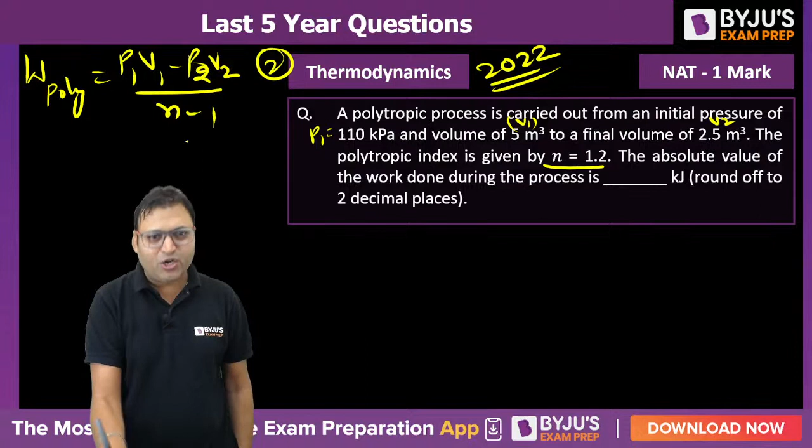YouTube channel. So the work done in a polytropic process, the simple formula is P1 V1 minus P2 V2 upon N minus 1. Do you remember? P1 is known, V1 is known, V2 is known, N is known. The problem is about P2. So for a polytropic process, can we say P2 by P1 is equal to V1 by V2 to the power N?

For a polytropic process, can we say P2 by P1 is equal to V1 by V2 to the power N? So what is P2? That is P1, 110 kilopascal. What is V1 by V2? 5 upon 2.5, that is 2, to the power 1.2. What is the value of P2? Who will be giving me the value of P2? Keep your pen, notebook and calculator. And do let me know if my value is matching with yours or not.

252.71. Very nice. 252.71 kilopascal. Once you get the value of P2, then you can easily find the work done. If the answer should be in kilojoule, keep the pressure in kilopascal. Do not get confused with the units. You should be comfortable with the units so that you can play with them.

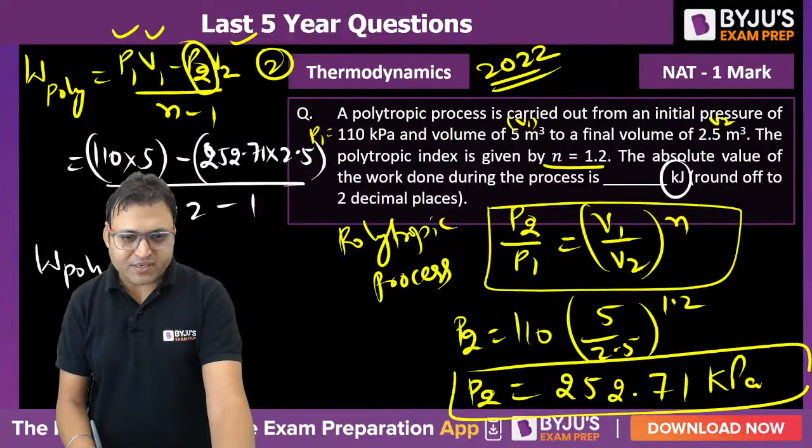So what is P1? 110 into what is V1? 5, minus what is P2? 252.71 into what is V2? That is 2.5, upon N minus 1, that is 1.2 minus 1. What will be the answer? What is the work done in a polytropic process? Who will get me the answer for this? Quickly, everyone. You will be getting negative. Are you getting negative?

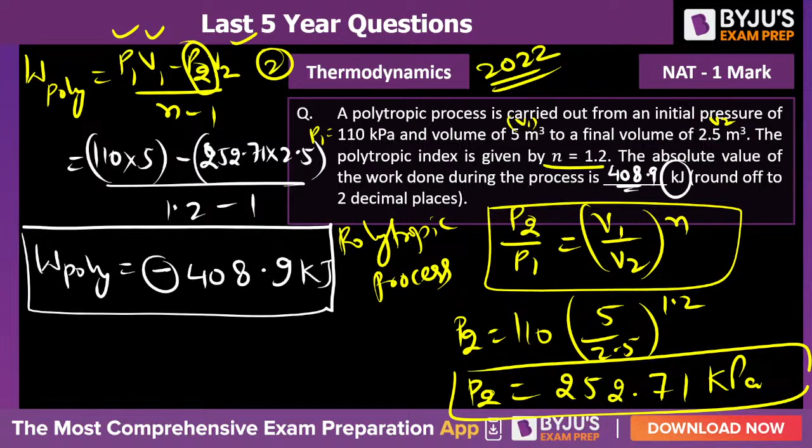408.9 kilojoule. Why are we getting it in kilojoule? Because the pressure is taken in kilopascal, isn't it? 408.9 kilojoule will be the correct answer to question number 2. Let us move to the next one. Yes, Arnab, Nitesh, well done.

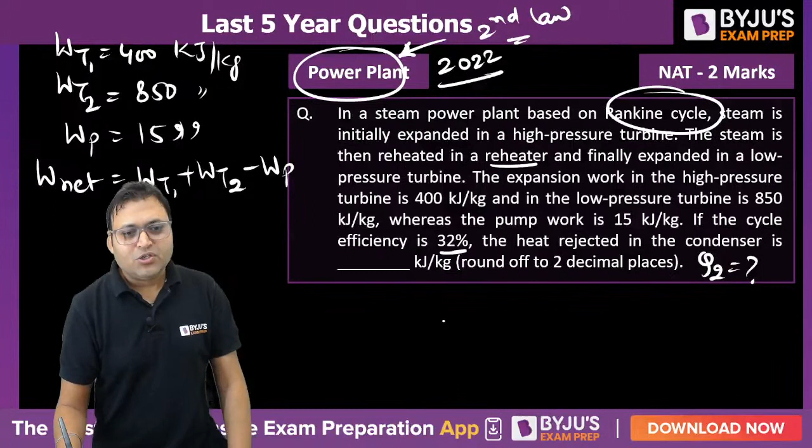So W net will be equal to 400 plus 850 minus 15 kilojoule per kg. Can you find out the value of W net? 1250 minus 15, 1235. So the thermal efficiency 0.32 is equal to W net upon Q1, heat supplied. So Q1 is equal to W net upon 0.32, that is 1235 upon 0.32. So Q1 will come out to be

3859. Yes, very nice. Are you getting Q1 as 3859.37 kilojoule per kg or not? The question is not about heat input. The question is actually about heat output to the sink. So Q2 must be equal to Q1 minus W net. So it will be 3859.37 minus 1235. That will give you the final answer.

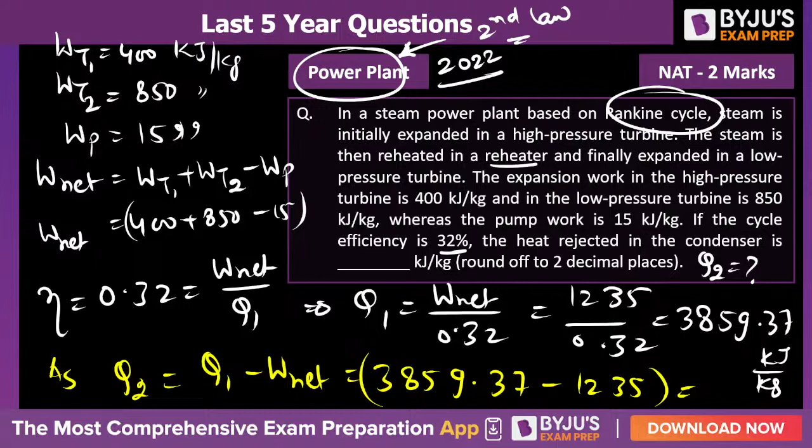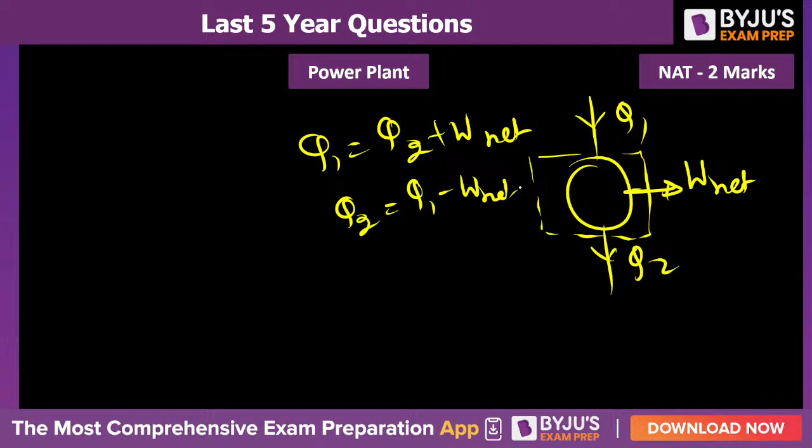Are you adding it? You need to subtract. If we draw, this is Q1 heat added, this is Q2 heat rejected, this is the net work output. From the first law of thermodynamics, Q1 is equal to Q2 plus W net, or Q2 is equal to Q1 minus W net. You need to subtract it. Are you guys getting 2624.3? Give me yes, give me cheer.

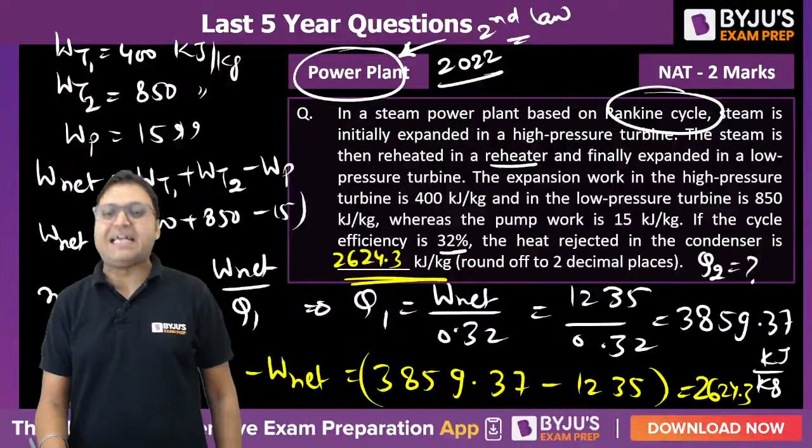2624.3. 2624.3 kilojoule per kg. Simple question from the cyclic device, work producing cyclic device, whether it is Rankine cycle or Brayton cycle or Otto cycle. How does it really matter? How does it matter, right?

Critical pressure is the pressure for which the velocity of the fluid becomes velocity of pressure wave. That is called as critical pressure. The velocity of the fluid becomes equal to velocity of the sound. So Mach number is equal to 1. This happens at the throat. So for the critical flow condition, Mach number will be equal to 1, the mass flow rate will be maximum and the back pressure will become equal to critical pressure. These are the characteristics of choked condition, right?

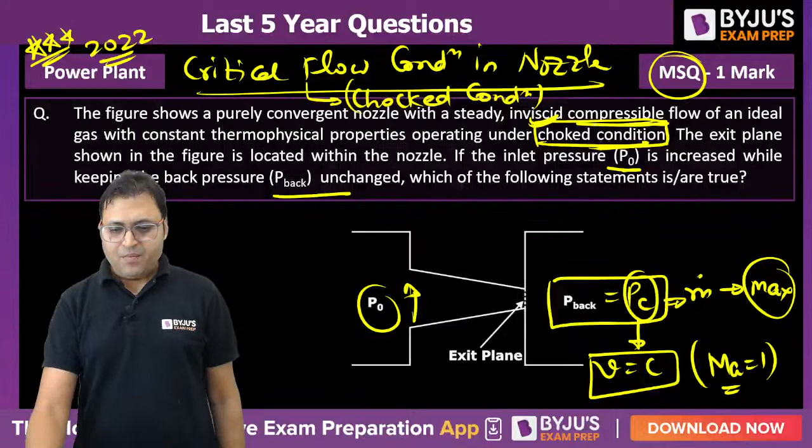Mass flow rate per unit area is given by under root of gamma by R into P naught by under root T naught into (1 upon (gamma plus 1) by 2) to the power (gamma plus 1) upon twice of (gamma minus 1). This is the expression. So mass flow rate will be dependent on P naught. As P naught increases, the mass flow rate also increases. B and C will be the right answer for this one. B and C both will be correct.

The next question is from 2023. Can you guys solve the next one? A heat engine extracts heat QH from a thermal energy reservoir at a temperature of 1000 Kelvin, that is T1, and rejects heat QL to a thermal reservoir at a temperature of 100 Kelvin. This is T2. While producing work, which one of the following combinations of QH, QL and W given is allowed?

First law says Q1 should be equal to Q2 plus W. That is the first law of thermodynamics. If we talk about an engine, Q1 is heat added, Q2 is heat rejected, and W is the work output. So from the first law of thermodynamics, for any system, the net heat transfer is equal to net work transfer, or energy entering is equal to energy leaving.

If you talk about option A, QL plus W is equal to 1500, but QH is 2000. A violates first law. If we see D, QL is equal to 600 and W is equal to 5500, it means it is greater than 6000. D violates first law. So B and C are the probable candidates. If the efficiency of this heat engine is less than Carnot efficiency, then only the cycle will be possible. So what will be the Carnot efficiency?

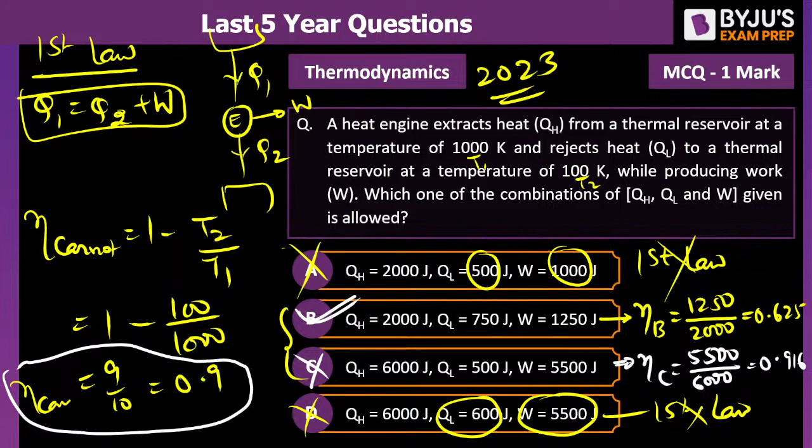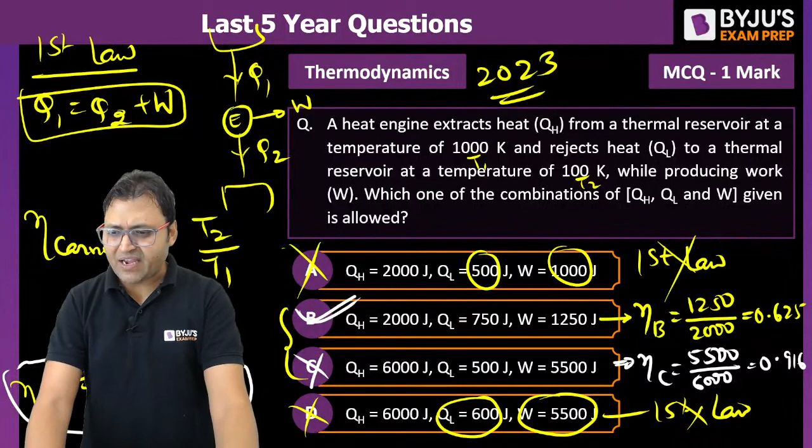Isn't it 0.916? So C cannot be correct because the efficiency should always be less than the Carnot efficiency. So only B can be the right answer. It is only B which can be correct. I hope this is clear. Right? Shall we proceed further? If anybody is having any doubt, you are most welcome to ask me.

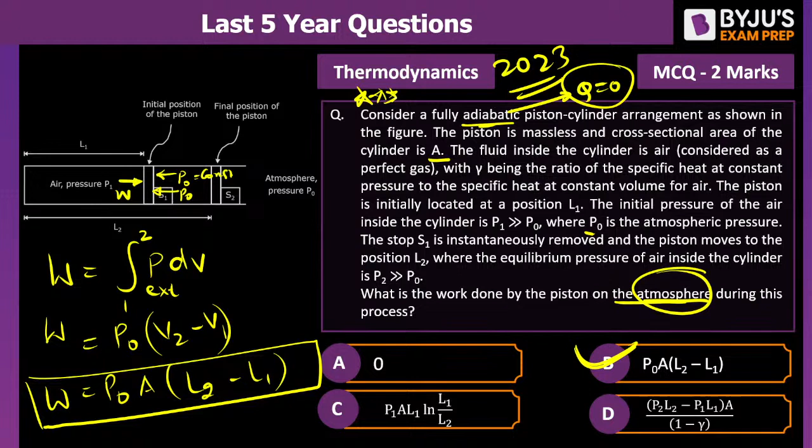Right? Let us move to the next one. Consider a mixture of two ideal gases X and Y with molar mass. This was asked in 2023. Consider a mixture of two ideal gases X and Y with molar masses. Molar mass is molecular weight. Either we call it as molar mass or we can call it as molecular weight.

And what is the unit of molecular weight? Gram per mole or kg per kilomole. So the molecular weight of X is equal to 10 kg per kilomole and the molecular weight of Y is 20 kg per kilomole. These are the molecular weights or molar masses respectively in a container. The total pressure in the container is 100 kilopascal. It is the mixture, so total pressure of the mixture is equal to 100 kilopascal.

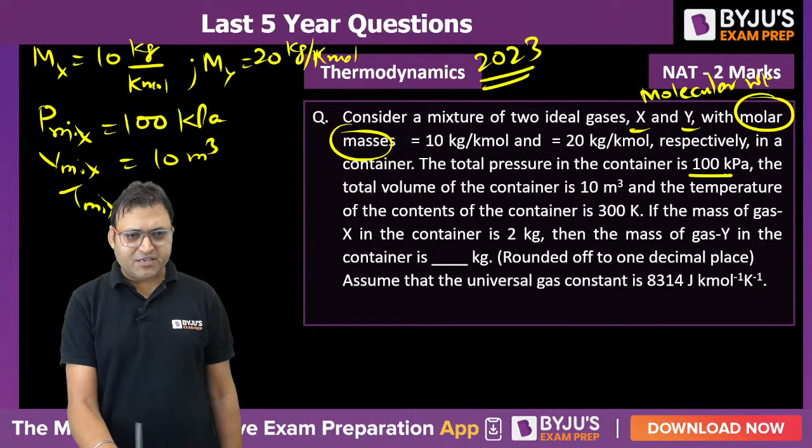The total volume of the container, volume of the mixture is equal to 10 meter cube, isn't it? And the temperature of the content of the container is 300 Kelvin. Temperature of the mixture is equal to 300 Kelvin. If the mass of X in the container is 2 kg, mx 2 kg, then the mass of Y is how much? That is the question. Can you find out my? How to do it?

They are ideal gases. These are the ideal gases. So can we write the ideal gas equation? PV is equal to mRT. P mix, V mix is equal to m mix into R mix into T mix. Or can we write it as PV is equal to N into R bar. R bar is universal constant into T. N mix into R bar into T mix.

So temperature of the mixture is given. R bar we all know. Universal gas constant is already mentioned, 8314 joule per kilomole Kelvin. And pressure of mixture is given. We need to write N for mixture, that is equal to Nx plus Ny. The number of moles of the mixture is Nx plus Ny. So what is Nx plus Ny? Pressure of the mixture is 100 kilopascal. Volume of the mixture is 10 meter cube.

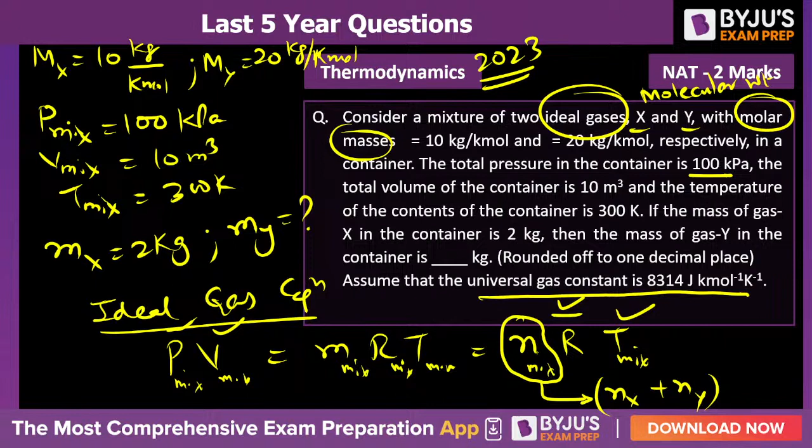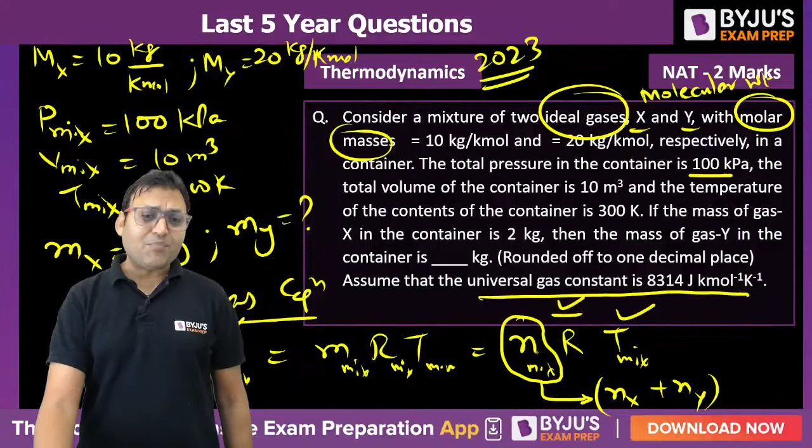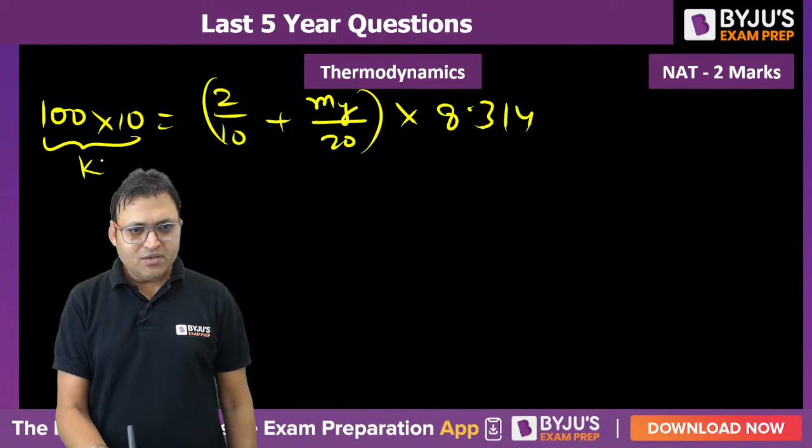Volume of the mixture is 10 meter cube is equal to Nx plus Ny. So mass of X, mx, that is 2 by 10, plus my, which is unknown, divided by molecular weight 20. Number of moles is mass upon molecular weight, in kilomole. Then R bar, can we write it as 8.314 because we want in kilojoule. Left hand side is kilojoule. 100 kilopascal into 10 meter cube is kilojoule, into temperature of the mixture, 300.

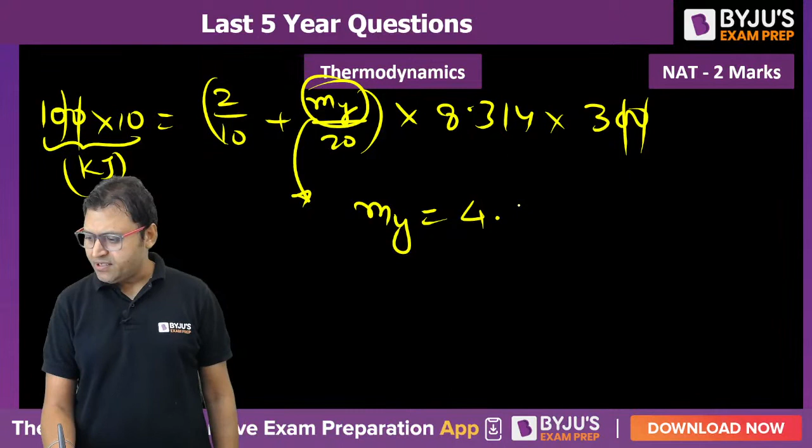Can you find out the value of unknown my? Yes, your turn now. Yes, Nitesh, well done. So these zeros will get cancelled out with this 2. So we can find out the value of my. Solve for my. My should come out to be 4.02 kg. It should be around 4.02 kg.

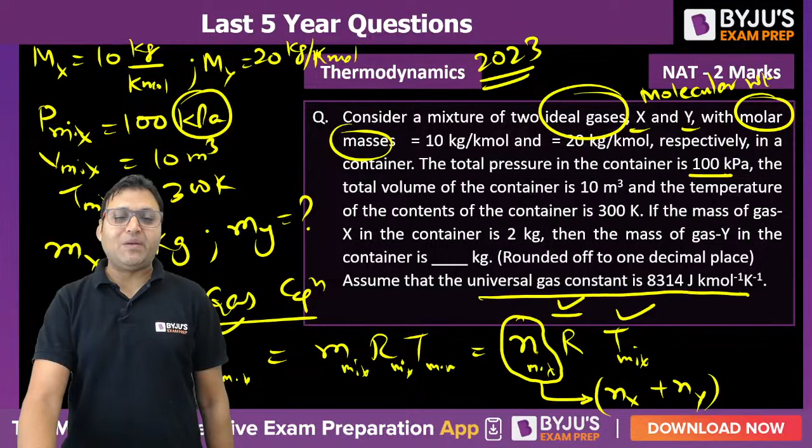Do not commit mistake in the units. If you are taking 8314, do not forget to take pressure of the mixture as 100 into 10 to the power 3. Pressure in kilopascal multiplied by volume in meter cube will become kilojoule. So because it is in joule, we need to convert it into kilojoule, then we will get the answer.

The next question, again from the compressible flow. Lot of questions were asked from the compressible flow in 2023. Question number 9. We are having around 15 questions in total. Consider an isentropic flow of air, specific heat ratio gamma 1.4, through a duct as shown in figure. The variations in the flow across the cross section are negligible. The flow conditions at location 1 are given by this: pressure, density, velocity.

The duct cross sectional area at section 2 is given by A2 is twice of A1. A1 denotes the cross sectional area at 1. Which one of the following statements about the velocity U2 and pressure P2 at location 2 is true? We need to find out the Mach number at location 1. That is U1 upon C1, U1 upon under root of gamma R T1, isn't it? So can you find out the Mach number at 1? U1 is given as 400.

And how to find out R? P is equal to rho RT. So R is equal to P by rho into T. So we can say 400 upon under root of gamma, 1.4, into P1 upon rho 1 into T1, into T1. Can you find out the value of T1?

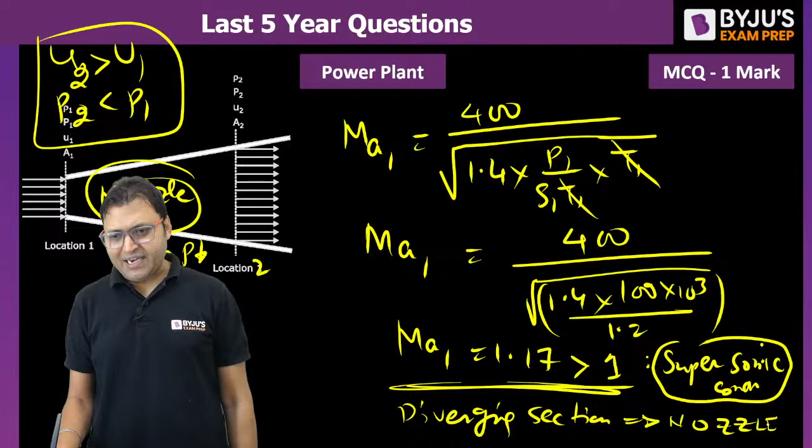In case of supersonic flow condition, if the Mach number is greater than 1, then the divergent section, this is location 2, is a nozzle, and in case of a nozzle, velocity increases and pressure decreases. So U2 is greater than U1, and P2 will be less than P1. Do you understand it? The diverging section will become a nozzle, and a nozzle always increases the velocity at the cost of pressure.

Option C will be the right answer for this one. This was question number 9. Let us move to question number 10, asked in 2022. An engine running on an air standard Otto cycle, constant volume cycle, has a displacement volume. What is the displacement volume?

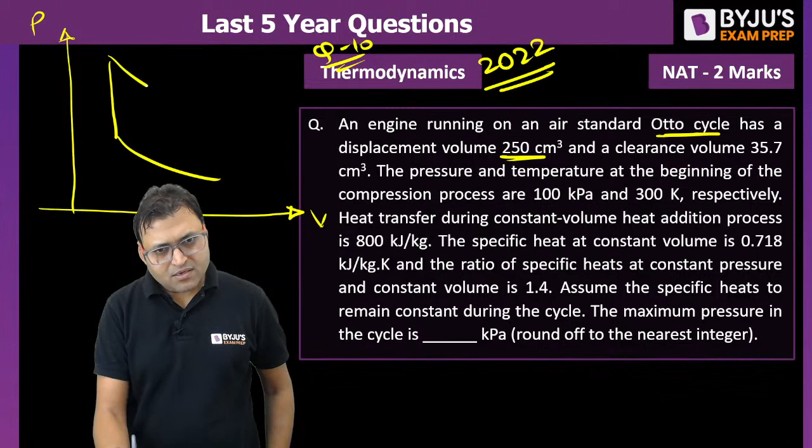If we draw the Otto cycle on a PV curve, it is something like this. 1 to 2 is isentropic compression, 2 to 3 is constant volume heat addition, 3 to 4 is isentropic expansion, and 4 to 1 is constant volume heat rejection. This is the Otto cycle. And what is the displacement volume? Displacement volume is this. This is V1, this is V2.

So displacement volume V1 minus V2 is given as 250 centimeter cube, and the clearance volume is this VC, and this is VS, swept volume or displacement volume. So V2 is given as 35.7 centimeter cube. The pressure and temperature at the beginning of the compression process are P1, 100 kilopascal, and T1, 300 Kelvin respectively.

Heat transfer during the constant volume heat addition process, this is QS per kg. The specific heat at constant volume is 0.718, and the ratio of specific heat at constant pressure and constant volume is 1.4. Assume the specific heat to remain constant during the cycle. The maximum pressure in the cycle: P3 is the maximum pressure. We need to find out the maximum pressure.

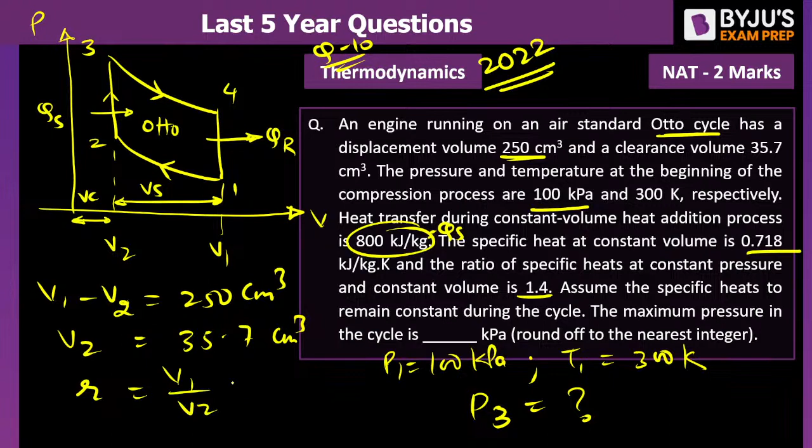But before that, can we find out the compression ratio? R is equal to V1 by V2. So can we say V1 minus V2, which is 250, divided by V2, which is 35.7. So V1 by V2 minus 1 is equal to 250 by 35.7. This is the compression ratio.

What is the value of R, the compression ratio? Will it come out to be 8? 250 divided by 35.7 is nothing but 7. So 7 plus 1, 8. Compression ratio will be 8.

Now, we need to find out P3 from 2 to 3. The process 2 to 3 is constant volume. If constant volume, we can say P is directly proportional to T. So P3 upon P2 is equal to T3 upon T2. We can find out the value of P3 from here. But for that, we require P2, T2 and T3, which we do not know.

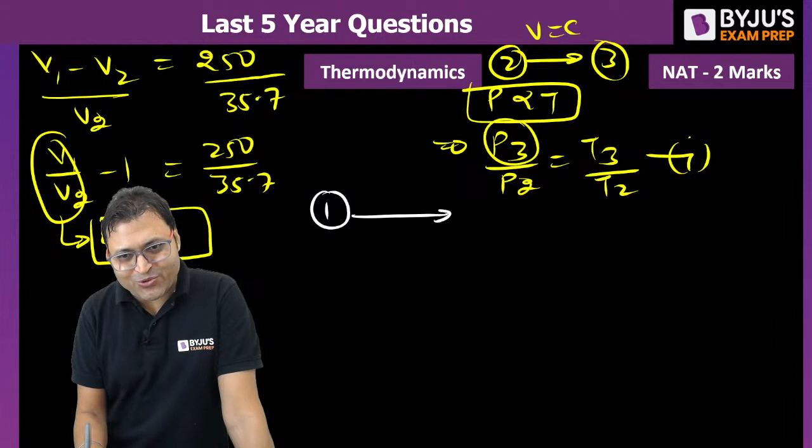So starting with the initial step, process 1 to 2 is isentropic. Then can we say P2 by P1 is equal to V1 by V2 to the power n or gamma? And V1 by V2 is R. So P2 is equal to P1 into R to the power 1.4. P1 is given as 100 kilopascal, into 8 to the power 1.4. Can you find out the value of P2?

Can you find out the value of P2? 1837.9. Are you getting P2? And similarly, we can say T2 by T1 is equal to V1 by V2 to the power gamma minus 1. So from here we can find out T2. T1 is given as 300 Kelvin. 300 into 8 to the power 0.4.

So T2 will come out to be, can you find out P2 and T2? T2 should come out to be 689.22. Right? T2 will be 689.22. So once we get P2 and T2, then using the heat addition, 2 to 3 is constant volume heat addition.

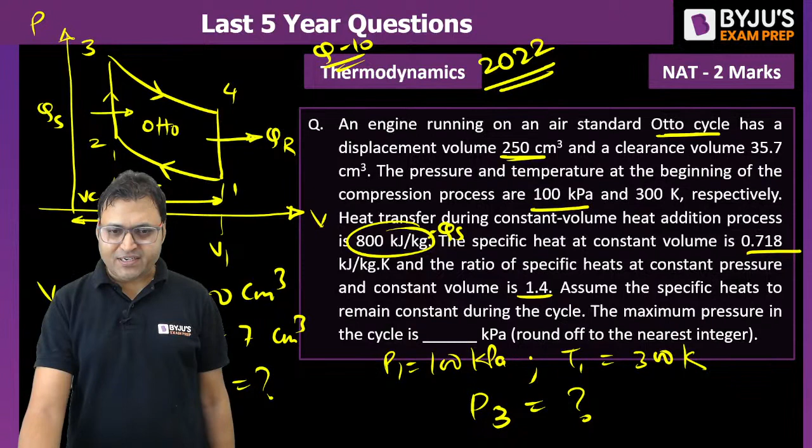So we can say QS is equal to CV into T3 minus T2. What is QS? How much is heat addition? 800 kilojoule. And CV is given as 0.718. 800 is equal to 0.718 into T3 minus T2. T2 is already calculated as 689.22. So using this we will get T3. The value of T3 should be equal to 1803.42.

Are you guys getting it or not? If you are not getting the values, please do let me know.

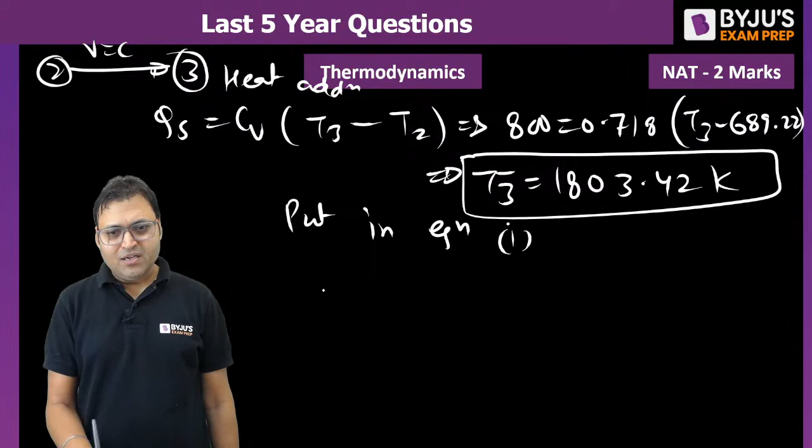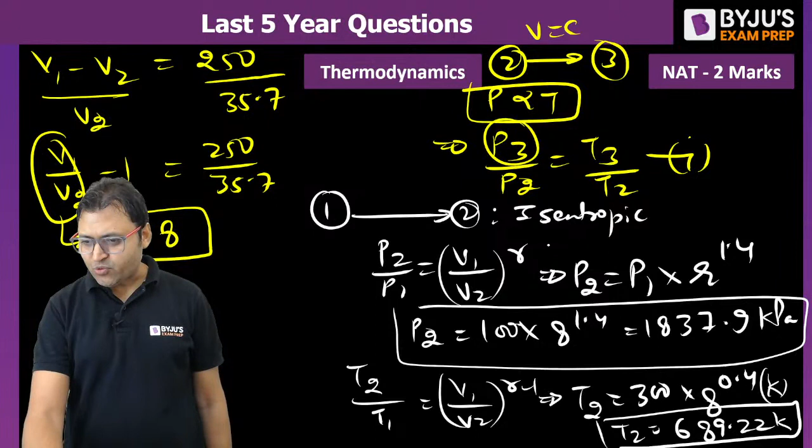Once we get all the values, put in equation number 1, so P3 is equal to P2 into T3 by T2. We have already calculated P2 as 1837.9, into T3 1803.42, upon T2, that is already calculated 689.22, will give the final value of P3. The final answer for P3 will be 4809.08.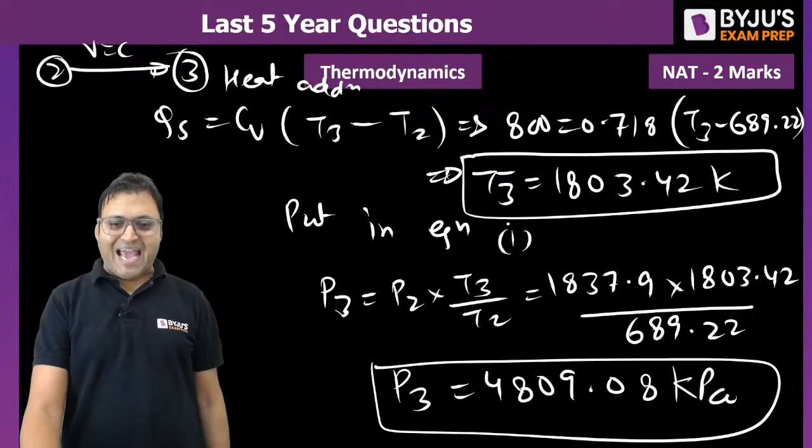4809.08 kilopascal. This is the maximum pressure in the cycle. I hope this is clear. 4809.08 kilopascal. Are you guys getting it? Bataiye, is this clear? This was question number 10 and let us move to question number 11.

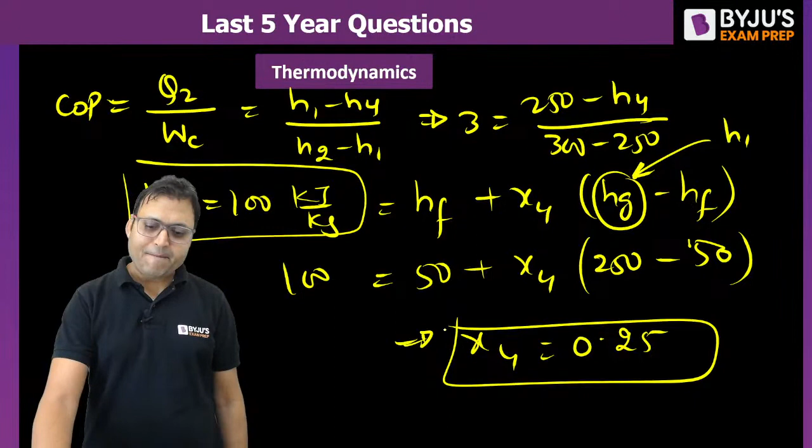0.25 will be the dryness fraction of the refrigerant at the entry, 0.25. B is the correct answer, right? The next question, question number 13. This was asked in 2022.

Consider 1 kg of an ideal gas, mass is 1 kg, at 1 bar, 300 Kelvin, contained in a rigid, means volume is constant, and perfectly insulated, means there is no heat transfer. The specific heat of the gas at constant volume is given. A stirrer performs 225 kilojoule of work on the gas. So the work input is equal to 225 kilojoule. Work is done on the system, so it will be taken as negative.

Assume that the container does not participate in the thermodynamic interaction. The final pressure of the gas is? So how to find out the final pressure? From the first law of thermodynamics, can we say Q is equal to W total plus delta U? Q is equal to 0. So delta U is equal to minus W total. What is the total work? That is minus W due to stirrer plus integration of PdV, that will be 0 because volume is constant.

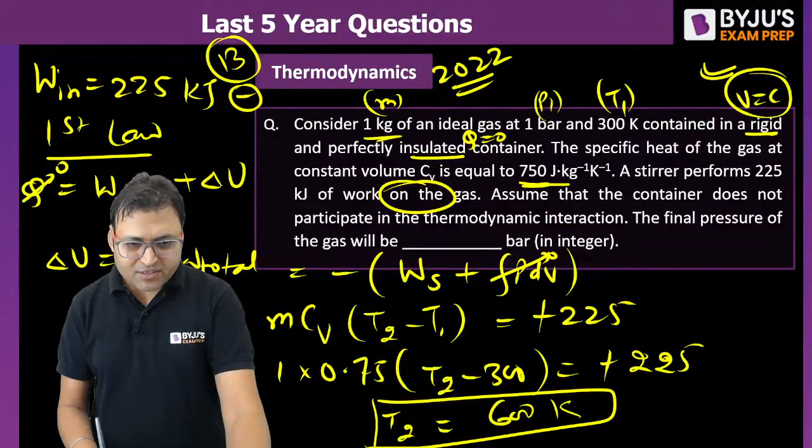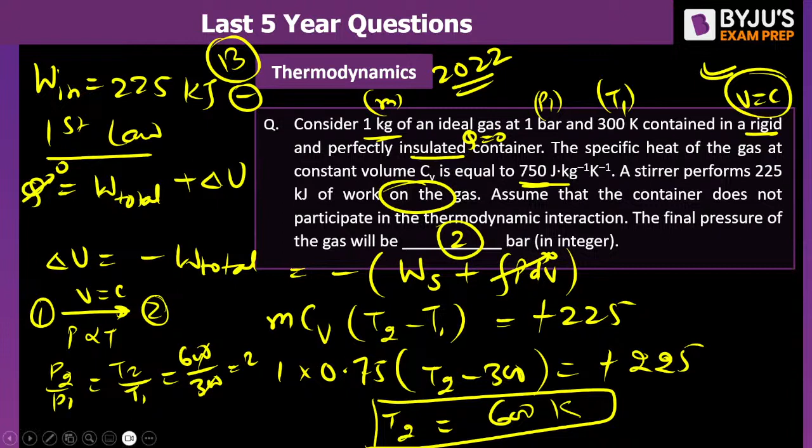Once we get T2, the process 1 to 2 is constant volume process. So we can say pressure is directly proportional to temperature. So P2 by P1 is equal to T2 by T1. What is T2 by T1? 600 by 300, that is 2. So P2 is twice of P1. So P2 will become 2 bar.

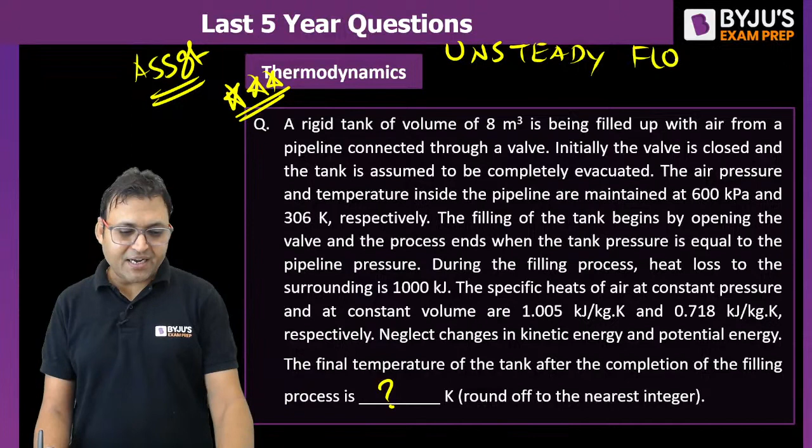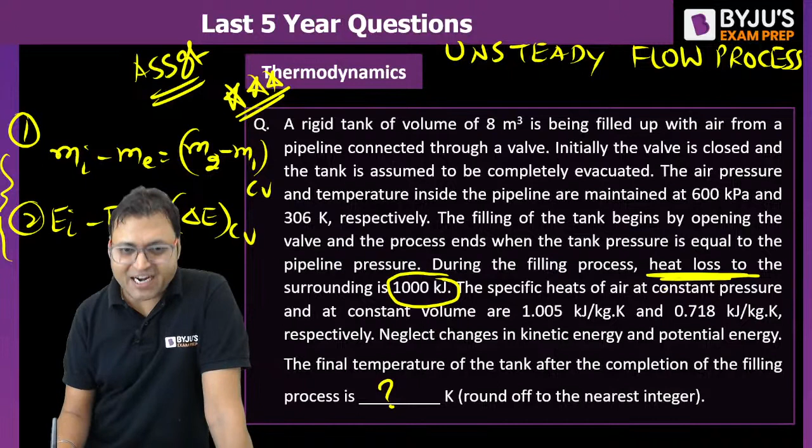For the unsteady flow process, mass conservation is mass entering minus mass leaving is equal to change in mass in control volume, and energy conservation says energy entering minus energy leaving is equal to change in energy in the control volume. The question will be solved by using these two. Now the problem here is that the heat transfer is not zero. If Q is equal to W is equal to 0, then T2 would have been gamma times Ti. But because here Q is not 0, T2 is not gamma times Ti. So you need to find out the value.

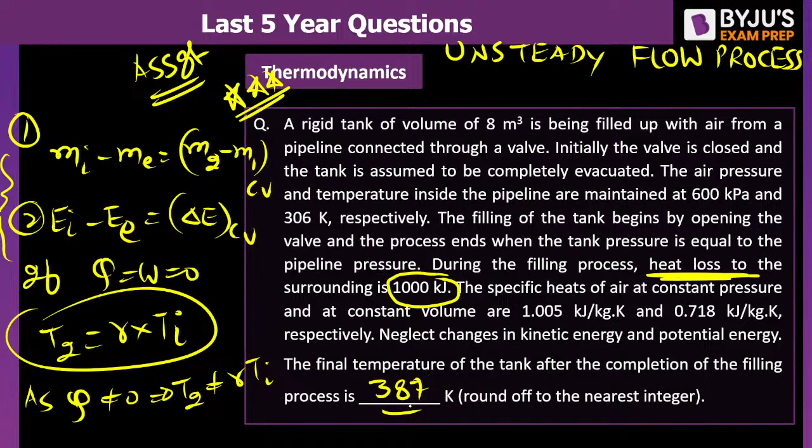Shall I share the answer? The answer should be 387. 387 Kelvin.

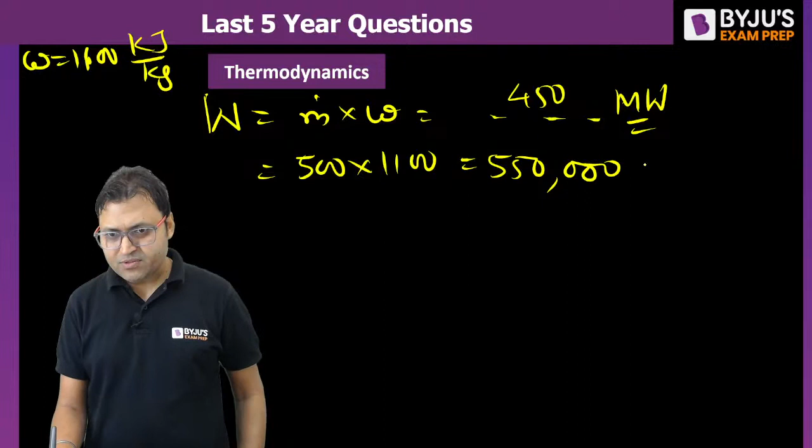Can you get me the answer for small w? 6.5 minus 6.3 is 0.2. 500 into 0.2 is 100. 3500 plus 100 is 3600, minus 2500. So w is equal to 1100 kilojoule per kg. If you multiply with mass flow rate, 500 into 1100, you will get 550,000 kilowatt. In megawatt, 550. Is it 550?

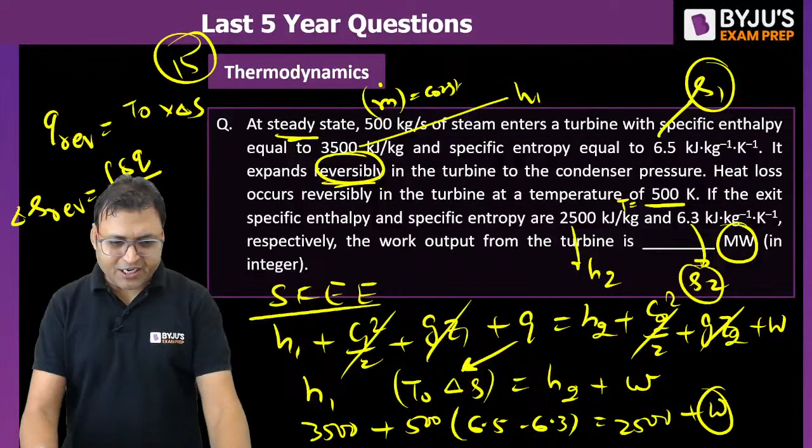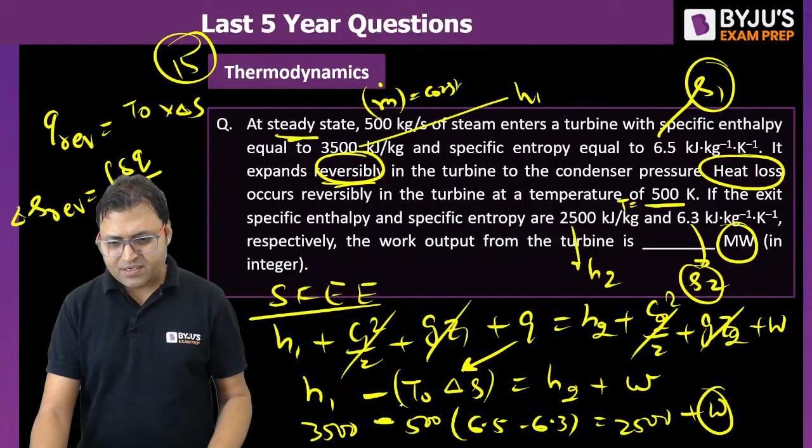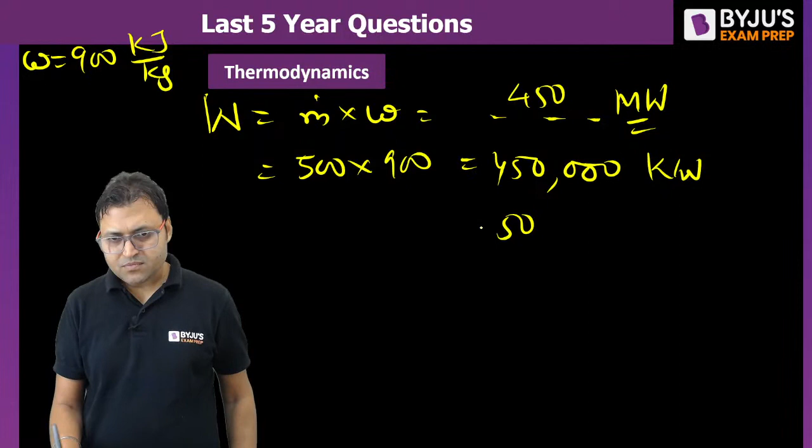Heat loss occurs, so it should have been subtracted, isn't it? That is the catch. Yes, it is the heat loss. So it should have been subtracted. Minus. So the value would be 900, isn't it? If you multiply 500 with 900, then you will get 450 megawatt. So the answer will be 450 megawatt.